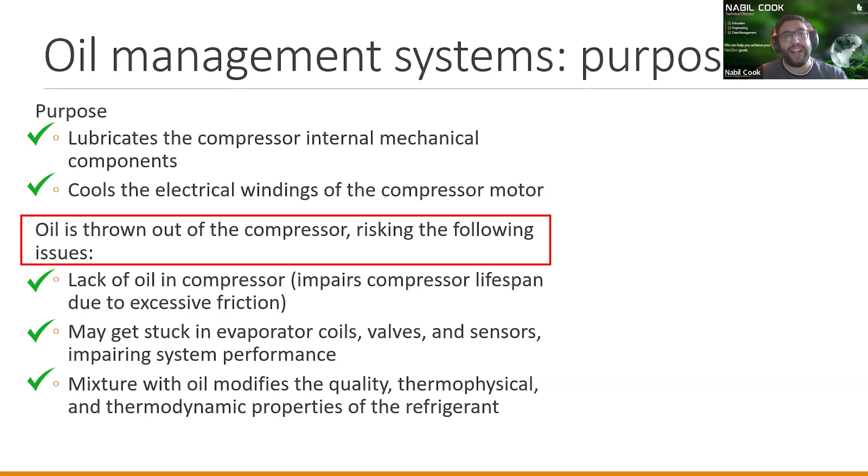What is the purpose of oil in a refrigeration system? Well, we all know it lubricates the compressor's internal mechanical components and cools the electrical windings of the compressor motor. Oil is thrown from the compressor discharge, risking a lack of oil in the compressor, which could impair the compressor's lifespan and affect its longevity, and can get stuck in far-reaching parts of the system. Oil and refrigerant don't act in isolation, they mix together, and this can affect the quality, thermophysical and thermodynamic properties of both fluids.

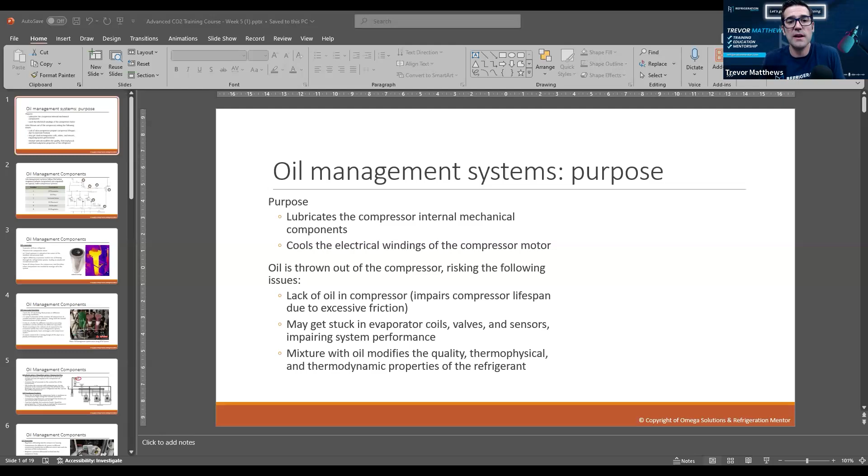So today, Nabil, we're going to be diving into CO2 oil design, oil management. We know this is one of the things a lot of people struggle with. Designers, technicians, sales, everybody kind of struggles with oil management because they don't spend a lot of time with it. Do you want to blow? There you go, beautiful. So hopefully everyone can take a look at the screen. If you're listening on the podcast, go over to the YouTube channel and watch it there.

So Nabil, I'll let you kick it off, brother. Thank you very much. So welcome to oil management systems with a specific interest in transcritical CO2 refrigeration. What is the purpose of oil in a refrigeration system? Well, we all know it lubricates the compressor's internal mechanical components and cools the electrical windings of the compressor motor. Oil is thrown from the compressor discharge, risking a lack of oil in the compressor, which could then impair the compressor's lifespan, affect its longevity, and get stuck in far-reaching parts of the system. And we know that oil and refrigerant don't just act in isolation, they mix together, and this can affect the quality, the thermophysical and thermodynamic properties of both fluids.

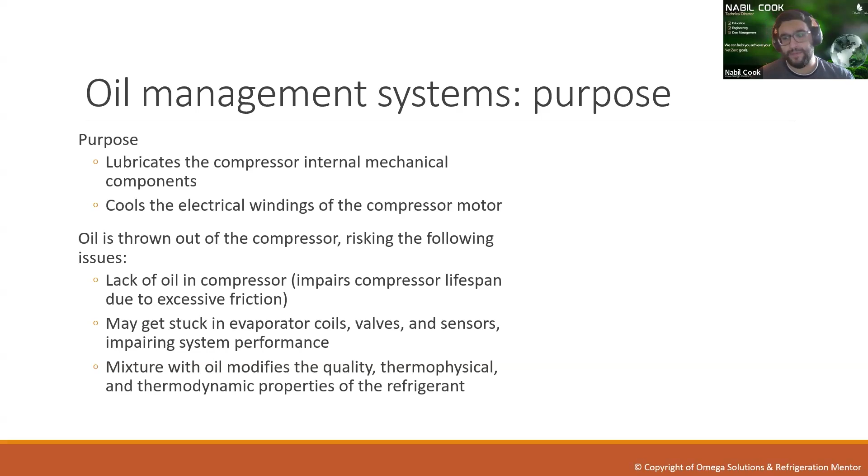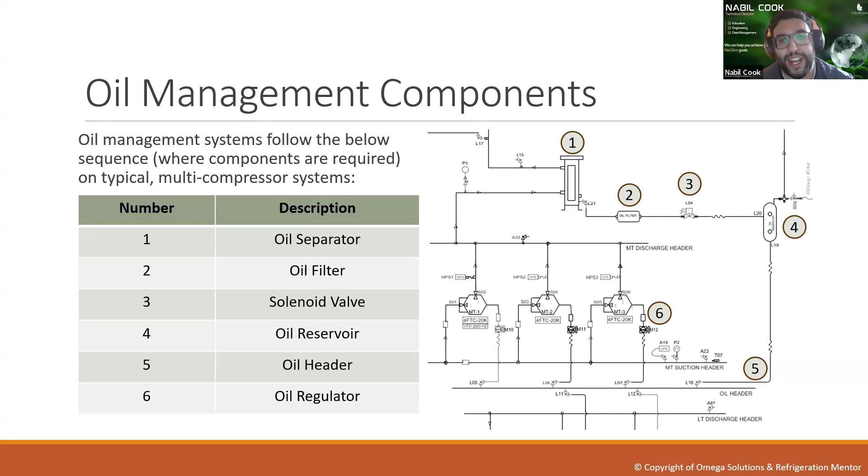So what do we have in a typical oil management system? Following our compressors, we've got an oil separator, number one. We then have an oil filter to keep debris and other impurities out of our oil, number three we may have a solenoid valve, number four we've then got an oil reservoir, number five an oil header, and number six oil regulators on our compressors to get the oil back in at the right rate and at the right time where needed.

Let's have a look at the oil separator first. As its name suggests, it separates oil from the refrigerant. It's placed at the compressor outlet. In two-level systems, it's placed at the outlet of the higher level, the medium temperature rack, not the low temperature rack.

These days we've got very high efficient separators, leading to less oil carryover into the rest of the system. Some oil always leaves the compressor, and therefore other components are needed to manage oil in the system.

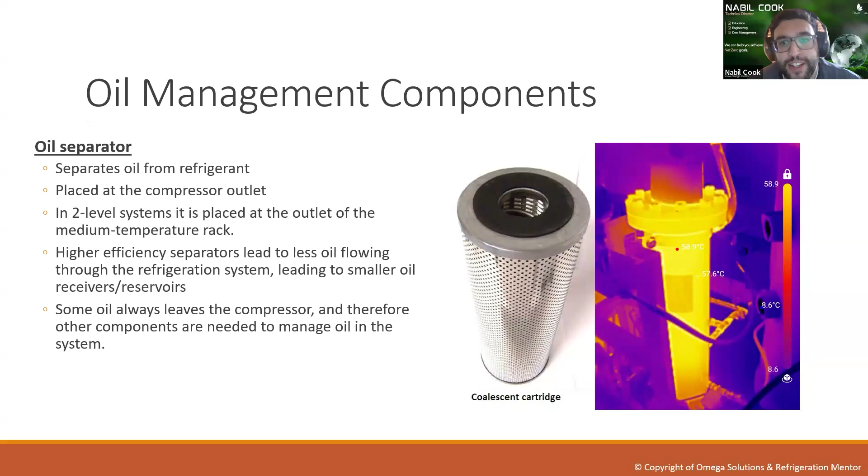So what we have here is an image of a coalescent cartridge, and you can see a perforated cylindrical bit of metal with perforated holes in it.

Moving on, we've got the oil reservoir and receiver. This is a buffer. It caters for oil circulating fluctuations at different operating conditions. It's sized as a function of displacement, along with the internal volume of the system. We have a wide range of transitory operating conditions in terms of part loads, part ambience, part saturated conditions, and that's why we need a buffer in terms of oil.

It's sized according to the volume of oil that's expected to be contained within the entire fridge system. This could be pipework, heat exchangers such as evaporators, condensers, whether they're coils, plates, vessels, whatever they are, and compressor bodies. It cannot account for poor design of pipework or a poorly maintained system.

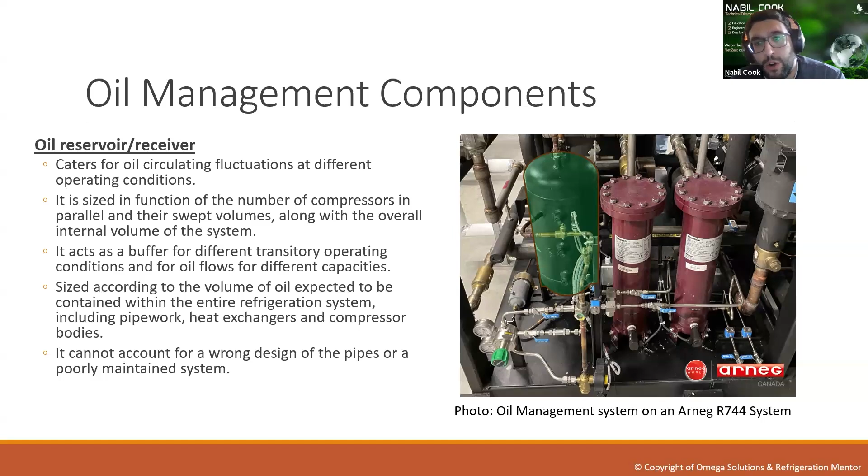On the right here we've got an oil management system, courtesy of an ARNEG CO2 system. As you can see there, we've got two oil separators in parallel.

Moving on, we've got an oil check valve, equalizer valve, or degassing line. This keeps the pressure in the oil reservoir in check, stops it getting too high, ensures an even supply of oil to the compressor regulators, connects the oil reservoir to the suction line of the compressors.

So oil reaches the reservoir with refrigerant gas. What we want to do is try and take out as much of that gas as we can. It discharges that excess vapor into the suction line of the compressor instead of it muddying the oil on the way into the oil sump.

Oil crankcase heaters keep the oil within the compressor body or crankcase at a temperature high enough for suitable operation. We don't want it to be too frigid because it doesn't flow well. It doesn't do what it needs to do.

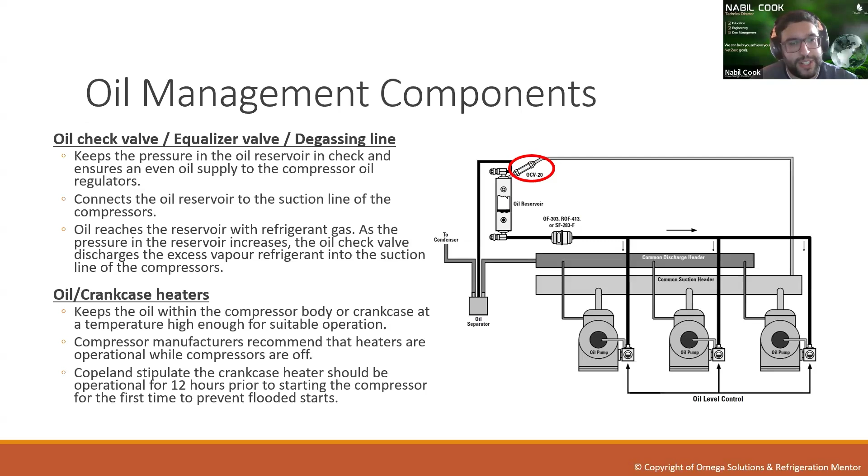Compressor manufacturers recommend that heaters are operational when compressors are off. And Copeland indeed stipulate that the crankcase heater should be operational for 12 hours before starting the compressor for the first time to prevent flooded starts.

Just before we jump into oil regulators, other manufacturers are going to do different things as well. This is stuff that you need to dive into and look at those manuals, because Bitzer, I think it says 95 Celsius - they want that oil, so it's not even a time. Some people will do time, some people will do temperature. You got to get into those manuals if you want to learn this stuff.

That's why Nabil knows this stuff. He's getting into the manuals and reading that stuff. You go, Nabil. Absolutely.

And then not every manufacturer uses the same metrics to determine whether something's okay. For instance, I've looked at plate heat exchanger performance. Some look at velocity only, some look at velocity plus shear stress. So don't just presume that because one manufacturer judges it on this, that all will judge on that same basis, because that's not necessarily the case.

So oil regulators regulate oil feeding into the compressor housing. They compensate for different oil returns in different compressors, maybe different sizes, different displacements, and different usage patterns of the compressor. So it requires a pressure differential to feed into the body.

And that delta P or differential is the reservoir pressure minus the suction pressure. So where oil is discharged from the compressor faster than it can be refilled through the regulator, the oil differential pressure must be increased. Typical differential pressure values we see are 1.5 bar, 3.5 bar, and 5 bar differentials.

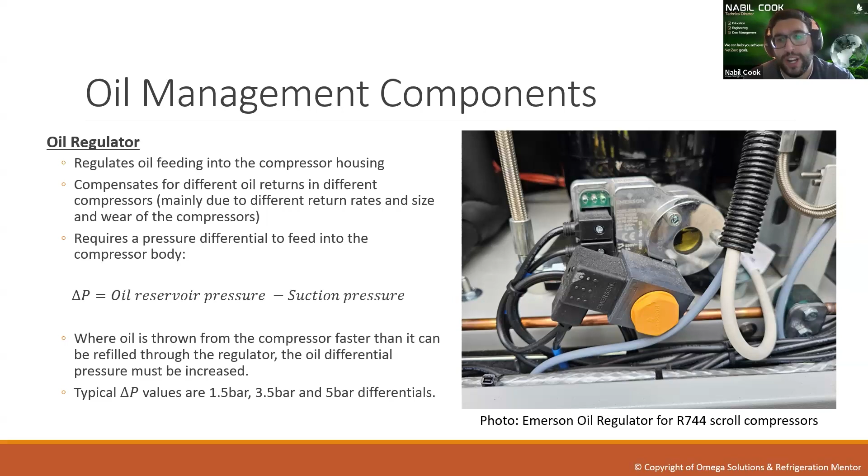Our photo on the right here is an Emerson oil regulator for transcritical CO2 scroll compressors. Moving on to the oil cooler.

Certain systems have got very high refrigerant discharge temperatures and therefore very high oil temperatures. What we don't want to always do is chuck that very hot oil straight back into the suction, because it won't cool the windings. If anything, it will heat the compressor up, cause more degradation, reduce efficiencies, and just shorten the life of the compressor.

So we want to cool that oil before sending it back. Several methods for cooling: natural convection - and you can see there we've got a natural convection coil. There are no fans on that. It's just in open air doing its job.

Forced convection, dependent on ambient temperature as well. And mechanically cooled, as in that oil is cooled by a separate and dedicated refrigeration system. So mechanical cooling circuits can use separate fridge systems feeding through a heat exchanger. We typically like to see oil temperatures in the range 50 to 70 on transcritical CO2.

That's Celsius, dependent on ambient temperature. So here we've got an Isentra transcritical CO2 system using the Copeland transcritical scrolls, the DVI mid-port, and the exposed oil cooler assembly that you can see there.

And so those oil lines that we've seen there, Nabil, those ones have to be designed specifically for the right size and the length, is that correct? Because you can't just go and say, okay, I'm going to do 100 loops, 200 loops. It's specifically designed for that amount of loops, is that correct? That's absolutely right.

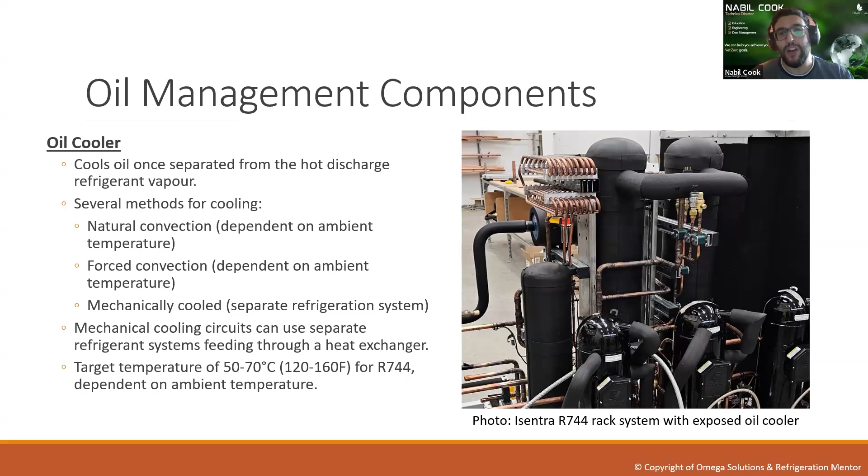And obviously it's sized accordingly. It's a natural convection thing. People cleverer than I will be able to do hand calcs to select a coil arrangement like that. Some people use software. Some people just have a good feel in their head for how many passes are needed and what the closeness of those passes should be.

Awesome, love it. So managing oil throw, don't presume that all compressor types throw oil in the same quantities or proportions. They absolutely don't. I'm not going to go into too much detail on this, but this is an example based on those Copeland transcritical scrolls.

Now, this is based on the third generation of those. That may have changed since and moved on, and I must say that, as it wouldn't be fair on Copeland for me to presume that things are the same. They may have changed since, they may have got better.

First thing is these transcritical scrolls with DVI mid-port don't use POE, they use PAG oil instead. The next why is that important? Why is that important to do that, Nabil? Going from what everybody uses, POE 85 or 68, going to the different oil.

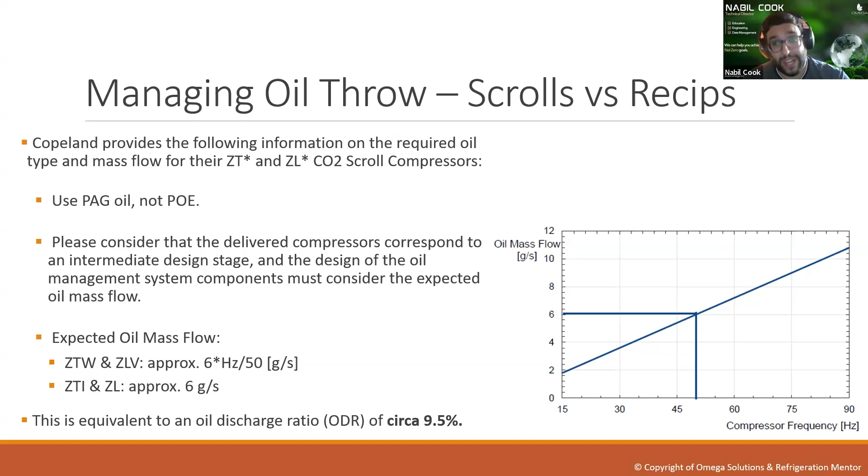It's important with these because they operate at a higher temperature, higher discharge temperatures consistently, not just at peak compression ratios, but across the full seasonal range of compression ratios. These have at least 10K extra of discharge temperature, and it was found that PAG was optimal for them because of that higher temperature range than POE.

So don't go in and just put any oils in, mixing oils. This is designed by the manufacturers, because I've seen it time and time again, mixing different oils run into issues on sensors and lubrication. So very, very important. Thank you, Nabil. No, absolutely.

So this is now the real important bit. Research suggests that these scroll compressors require an oil throw that's over 3 times that of the equivalent semi-hermetic reciprocating compressors at peak design conditions. That's going to affect your oil separator sizing, reservoir, oil lines, everything.

This is why I do not treat all compressors based on their displacement. Different technologies have different oil requirements. Remember that, that's so important. That's because I didn't know that, like, oh, it's a semi-hermetic, it has 6 cylinders. This Dorin, Bitzer, Bock, Copeland, they're doing the same, but it's not.

You want to dive into a little bit of difference, how they are different? Like, what are the things? It's the bore, it's the cylinders, the rings. It's about the design. Do you want to just dive into what causes that a little bit from the different manufacturers?

It really depends on whether it's a positive displacement compressor, whether it's rotational. So when we're dealing with a recip, we've got pistons that move back and forth just like a car engine, for instance. When we're dealing with scrolls, we've got a fixed vane and a rotating vane that are constantly meshing in and out of one another. And I think that's the reason that the oil flow requirements are so different, because you're just dealing with a completely different mechanism. That's as much as I can explain it, Trevor.

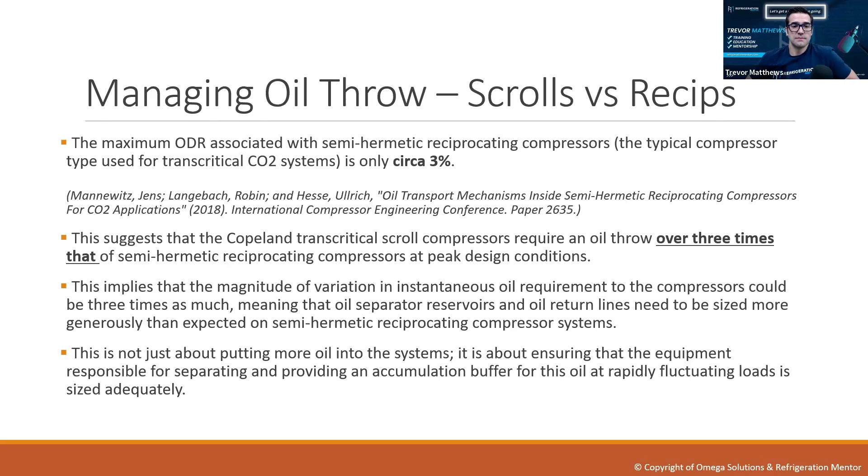So moving on, we've got oil management system strategies. Now, most of us are used to the strategy on the left, which is to have a single separator for multiple compressors. When we're dealing with large systems, and I mean really large systems such as ammonia in distribution centers with massive open drive screw compressors, we are more likely to have a dedicated separator for each compressor, therefore a multi-separator system. And I've seen both out there.

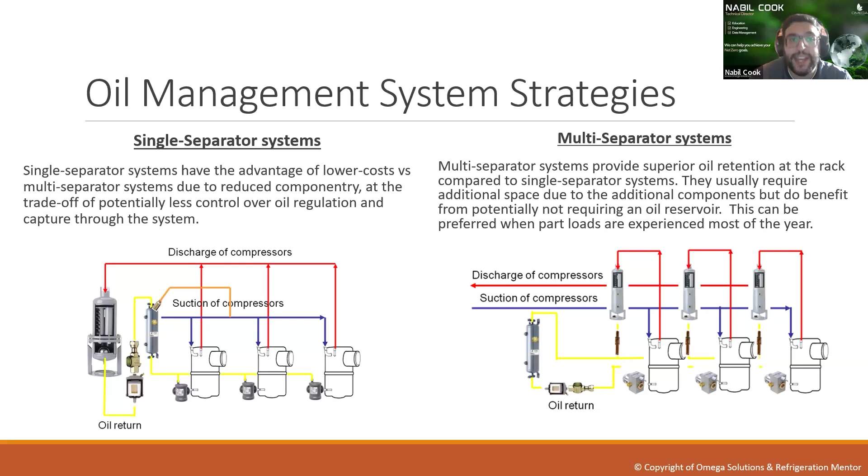Yeah, so have I in my time. Predominantly with the commercial food retail that I deal with here in the UK, it's generally the single separator systems, but I have seen examples of both. Yeah, same here. So mostly on the commercial supermarket style ones, single separator, getting up into more industrial one, seeing one separator for 2 compressors, and you have 8 compressors on there, maybe on the rack. So it all depends on the manufacturer and what they're trying to accomplish.

Usually the large ammonia open drive compressors that I mentioned are delivered as a skid with several components integrated. The oil separator is on the compressor skid, and many other ancillary items are also on that skid. So it's a difference in scale, a difference in market and application.

Moving on to oil concentrations, oil is always carried over into the rest of the system, even if an oil separator is installed. So to ensure continuous lubrication of the compressor, the oil has to be returned. Accumulation is not good. The solubility of oil in the refrigerant decreases with temperature, whereas the viscosity and density both increase. Therefore, the evaporator is critical because it's the absolute coldest point of the system, and the oil must be carried out of the evaporator as droplets by the exiting refrigerant vapor.

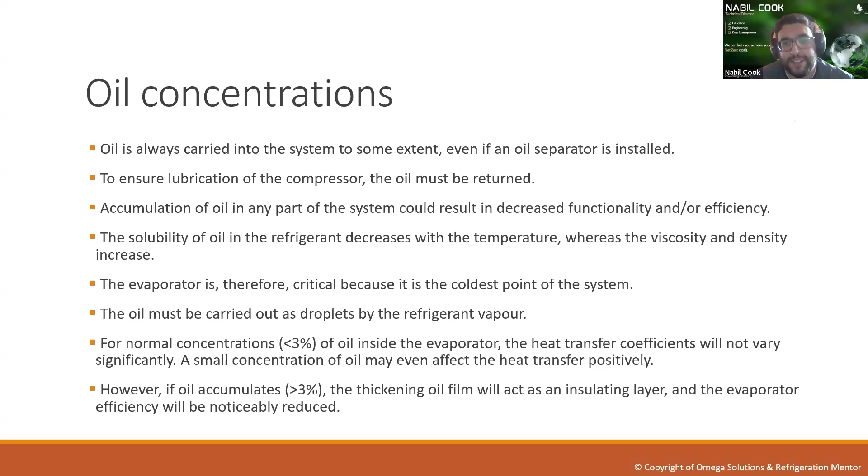For normal concentrations, which we define as less than 3% volume on volume of oil inside the evaporator, the heat transfer coefficients will not be affected significantly. Actually, there's some research evidence that a small oil film affects heat transfer positively. However, if oil accumulates beyond 3% volume on volume, that thickening oil film will act as an insulating layer, and the evaporator efficiency could be noticeably reduced.

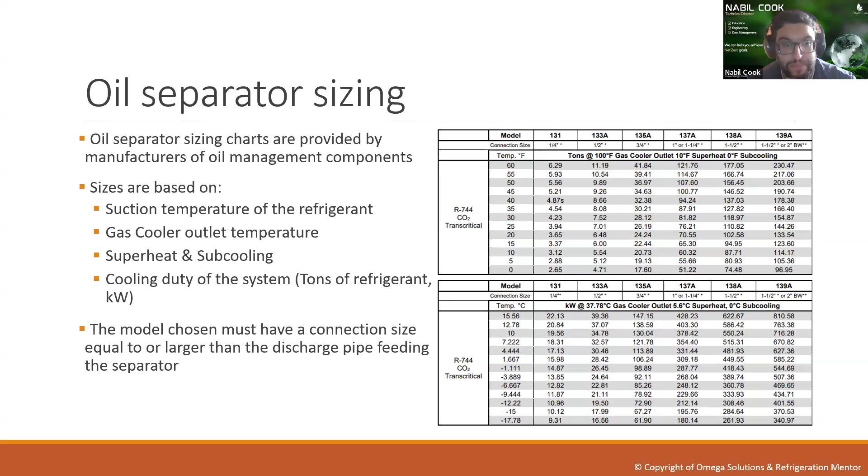So how would we go about calculating the size of a required oil reservoir and the system oil charge overall? You need to know something about the volumes of the systems, the internal volumes. There are 3 main contributors to this. There's the actual volume of the oil return line and manifold. There's the oil charge of the compressors as well, which should be listed in the compressor manufacturer's information on their data sheets, within their software, in their manuals, etc. Finally, there's the oil carryover volume into the rest of the system - the system pipework and heat exchanger internal volumes.

So if we've got no oil separator, presume we've got a 3% by volume concentration of oil in the remaining system internal volume. If we've got an oil separator, it's a lot less - presume it's 1% by volume in the remaining internal volume. So what do we do with all of that? We add it together. To get the required reservoir capacity, we add the oil return line and manifold volume to the compressor oil volume, to that system carryover volume, and then we multiply by a safety factor, say, of 25 to 50%.

So once we've got that reservoir in there, what's the total system volume charge of oil? Well, it will be the system volume before we added the reservoir, plus 80% of the reservoir's volumetric capacity. So that's how we work out what the total system volume of oil is.

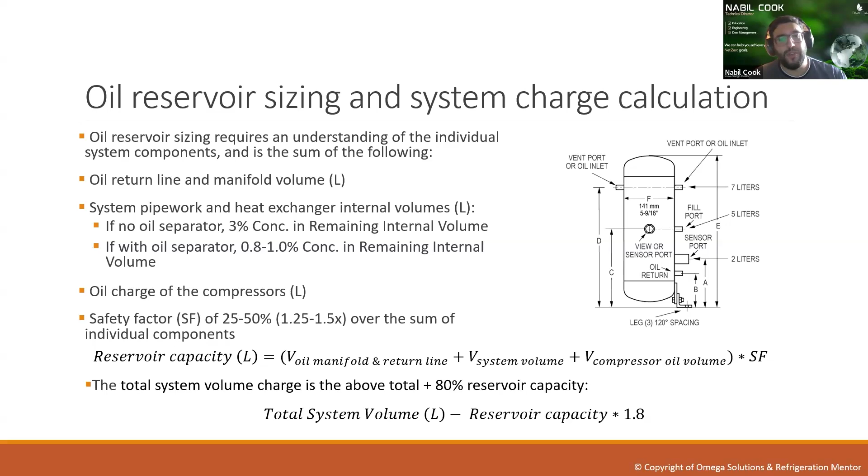And the big thing is, some of the things I'm seeing now, there are CO2 systems out there that don't even use an oil separator or oil reservoir. So you're going to see different systems depending on the application. You may not need a reservoir or a separator. So think about your design, and when you're designing a system, how do you reduce complexity, and how do you make sure that those compressors continue to stay lubricated?

There are examples of that. There are some systems out there in the field that are using the vessel as the oil capture equipment. There's a knowledge based on density difference of where the oil will be in the vessel, and it can be tapped off that port and transported back. I've not seen a lot of it, but I have seen an example, using natural gravity for it. Yeah, using gravity, absolutely.

So it's out there. When you come across it, learn more about it and try to get more. This is what it's all about. This is why we're here sharing this knowledge with all of you, trying to help you grow your knowledge. So if you learn about it, share that with somebody else, because these are the things that are going to help you get better at CO2 refrigeration.

Absolutely, nothing ever stays the same for long. Yeah, oil line sizing, right.

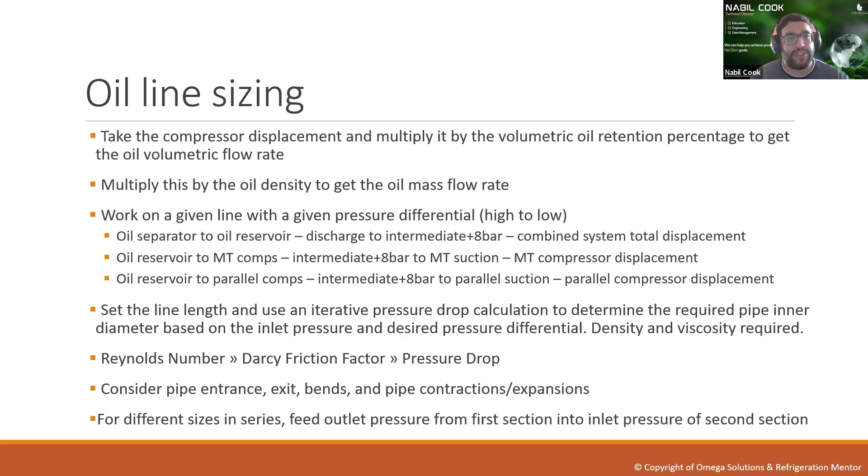So how does this work? Reynolds number to Darcy friction factor to pressure drop, fluid mechanics. So we consider pipe entrance, exit, bends, pipe contractions, expansions. For different sizes in series, feed the outlet pressure from one section of pipework into the inlet pressure of the second section and do another iterative calculation. And this is how we would go about sizing oil lines.

I told you things to consider. For transcritical CO2 with oil separator, oil retention concentration is 0.8% according to experimental data from published reports.

So oil viscosity, we're not dealing with oil alone. We're dealing with an oil refrigerant mix, say 12.5% weight on weight concentration of refrigerant in oil. That reduces viscosity significantly, from 240 pascal seconds to 74, at those conditions shown there.

Reduced viscosity obviously makes that pipe sizing less stringent. We can use smaller diameters as a result of having that refrigerant in the oil. Again, I've given some sources there as to where I've got that from. And the link between refrigerant weight and weight concentration and viscosity reduction factor was also found in a report. I can give you all of those references.

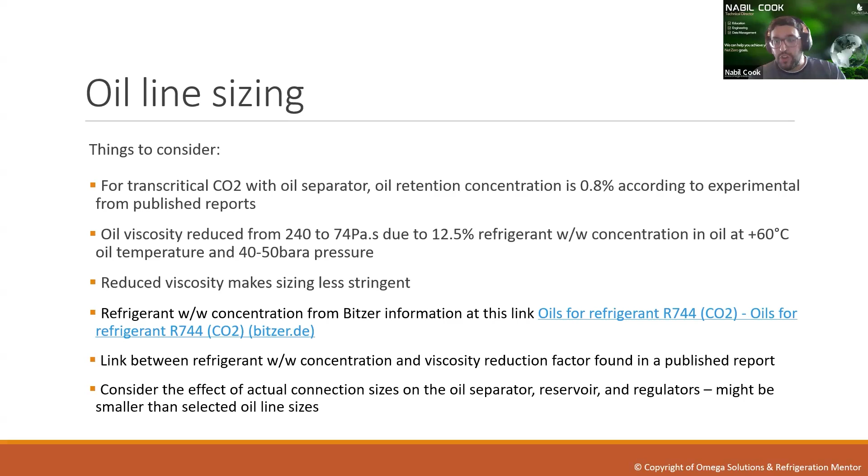Consider the effect of actual connection sizes on the oil separator. Just because your calcs say that this is optimal doesn't mean that that's what the component will have. So you might have the effect of some reducers, etc. And that's important to consider as well.

So this is a bit of a change in direction now. We're going to talk about part load system operations. At part loads, we have lower volumetric flow rates, velocities, and therefore turbulence. Oil separators must keep their efficacy at lower loads and ambient conditions. When sizing them, think about the full range of loads and temperatures that could potentially be experienced and make sure that the oil separator is effective at that full range.

Compressor turn down versus heat exchanger and pipe work minimum velocities are also important. So, for instance, brazed plate heat exchangers can typically get down to somewhere between 20 and 45% part load based on application and still return oil. So Swep, for instance, stipulate a minimum channel velocity of 0.3 meters a second for MT applications to ensure oil return in their heat exchangers. And they then caveat that low temperature applications may require higher channel velocities, and that makes sense.

So Alfa Laval go at it a different way. They actually are not so strict on the minimum channel velocity, 0.1 instead of 0.3 meters a second, but they expect a minimum channel pressure drop of 4.1 kilopascals at the same time as that 0.1 meters a second to guarantee oil return. So slightly different ways of defining expectations.

Control strategies for ensuring oil return. So split heat exchangers: instead of just having one big evaporator, can we split into multiple smaller evaporators that can be isolated during part load conditions to prevent the risk of oil logging?

Individual oil management systems per compressor. So this helps match oil return to oil expelled from each compressor during operation. Variable speed drives to match compressor displacement to load also assist with oil return as well. And periodic oil balancing, which is where basically we run a compressor hard for a short period of time to basically equalize, to get oil back to all the compressors and get the levels right back where it matters again.

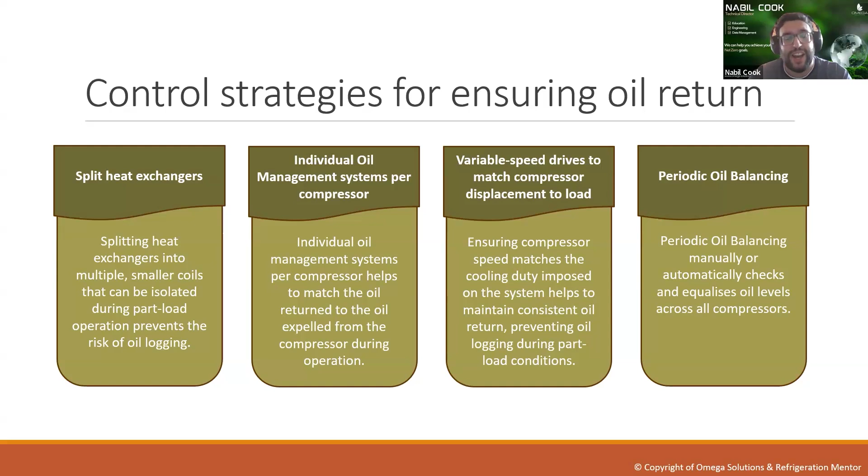So there are lots of different strategies at hand here for making sure that we get oil back to the compressors. So practicalities of oil: store it in a dry, non-corrosive environment prior to usage. Oil containers that are open should only be exposed to air for very short times.

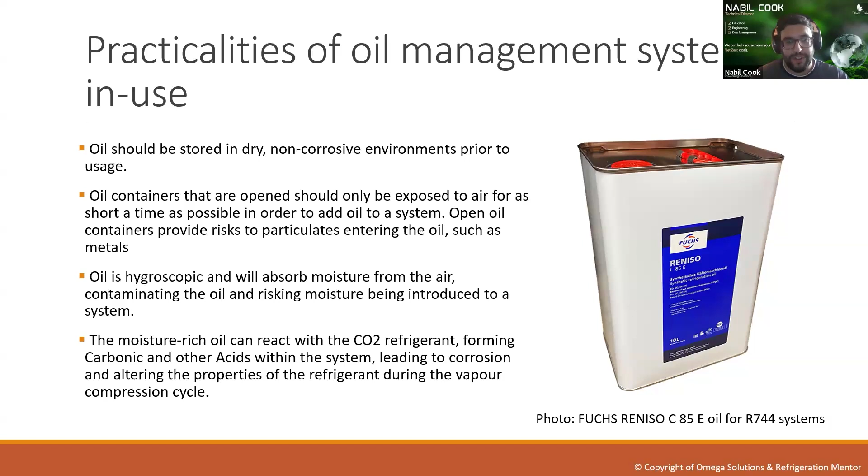Open containers provide risks to particulates entering the oil, such as metals. Oil is hygroscopic and will absorb moisture from the air, which contaminates it and risks moisture being introduced to a system. Moisture-rich oil can react with CO2, forming acid within the system, which can lead to internal corrosion and alter the properties of the refrigerant during the refrigeration cycle, and we definitely don't want that.

So this is a bit of a comparison of POE versus PAG. POE is polyol ester and PAG is polyalkylene glycol.

In terms of moisture criticality, POE is better for that. High lubrication performance, PAG is better for that. In terms of solubility and miscibility, they're equal, or they can be made to be equal. High temperature compatibility, PAG is better for that, as we discussed regarding the Copeland transcritical scroll compressors. We typically find that POE is used on hermetic and semi-hermetic applications, and PAG is used on open drive applications. So which to use?

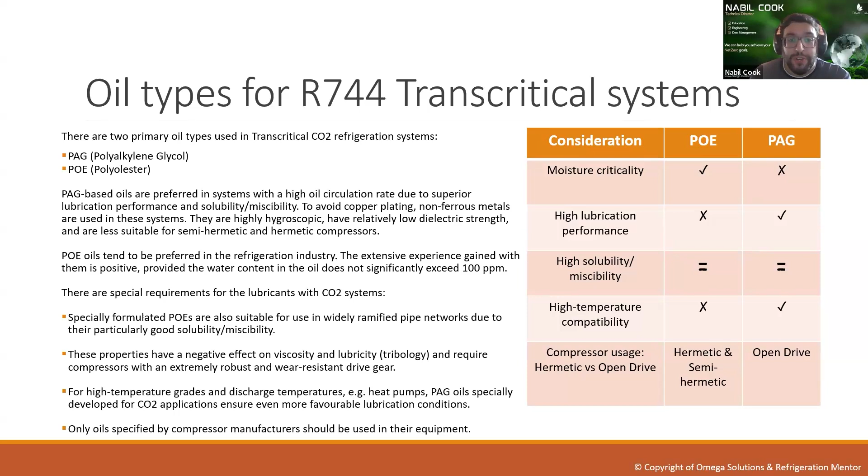It really depends on what you're doing, as you can see from this chart. And that's it, guys. Yeah, that's a lot. You can stop, we'll just kill this share here.

Nabil, that was awesome. That's a crash course in oil design. And even there, we went through that multiple times in our design course, and I've picked up a few things there. Oil carryover rate is one thing you can run into major issues with if you don't understand it. Temperature of oil will affect the design, affect the oil when you're designing these systems. And it's super key to dive into that.